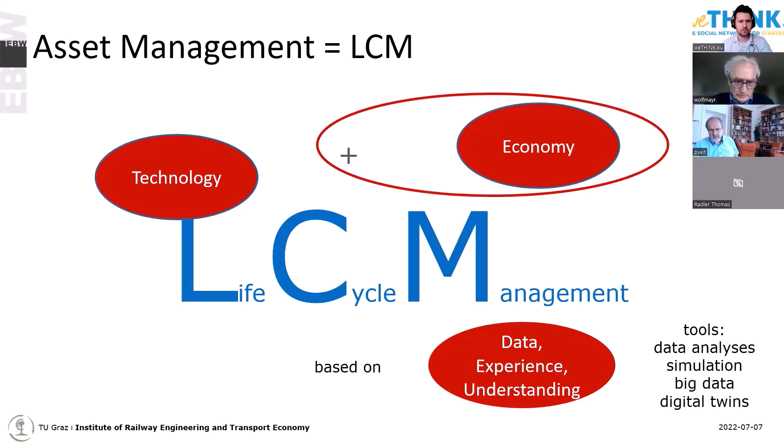Today we are focusing on the methodologies of the economic evaluation, because there are some specific things in railways which need adaptations of the methodologies. The methodologies of the evaluation are, of course, the standard methodologies, but we have to take some things into account.

So how do we understand this? We see the economic evaluation is based on a technical description. We already discussed this technical description in seminars before. Our way of describing a technical situation is a standard element. That means we look on track side, which parameters are there for a certain section of the track—how much traffic load, which radii, how is the subsoil, which superstructure, and all the parameters which influence the behavior of track.

And for these parameters, for such a mix of parameters, we could analyze the service life and the maintenance demand of a track. This is possible due to our data situation. I have time sequences of all infrastructure data for track and turnouts, operation and maintenance, components and ages, and things like this. We have these data at the Institute from the Austrian Railways, and we have got these data now in a time sequence of 20 years. So we see how it changes, we see the behavior, and we can do our analysis.

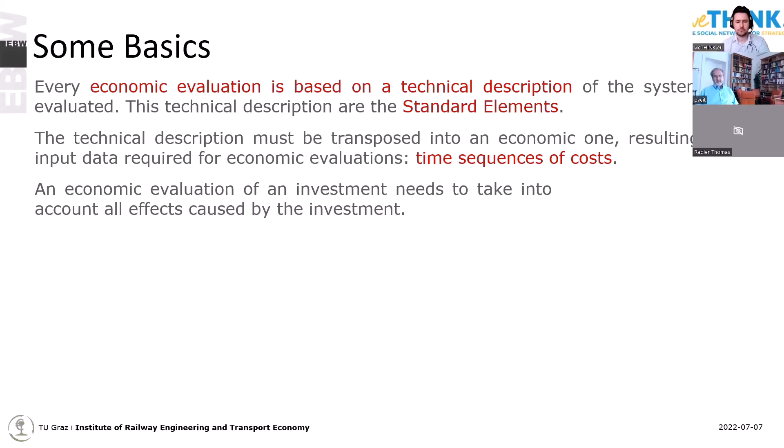There are some main principles which you might say, of course, must be like this. Within an economic evaluation of an investment or any decision, we need to take into account all effects caused by that investment. What does it mean, all effects caused by the investment? When you decide to use this or that track component and implement it in your network, there's the first question: how long is the time span which you have to look at? And if you take this sentence seriously, you need to take all effects into account to make a proper decision.

We are at life cycle costing, because whenever you put a component into track, it will influence your costs and track behavior as long as it is in your track. There is no component, or there's only one component which does not cause costs later on, and that's the component which you do not implement. Every component in the track has an influence on track behavior, therefore on maintenance demand, and therefore on costs for the entire time it is in your system.

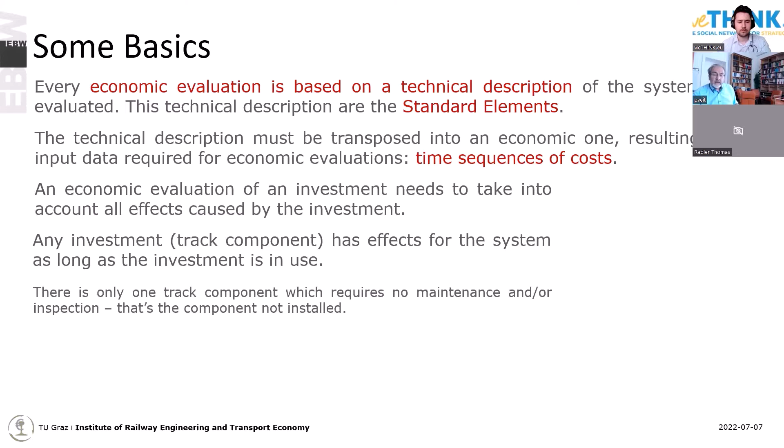That means the life cycle view is not just one approach to decision making, it is a precondition. Otherwise, you would never have a full view of the effects, and you would not know which effects you do not take into account, whether they are relevant or not. So you have to have a life cycle view.

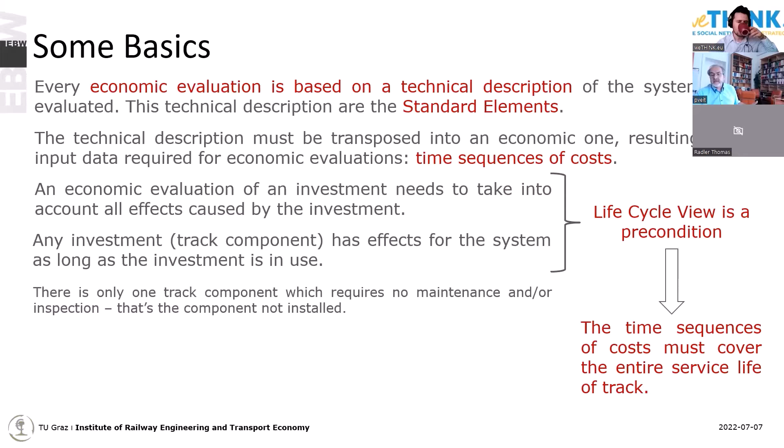That means when we take all the life cycle into account, we are basing everything on cyclic maintenance. So you do an investment, then you do years and decades of maintenance, and then you put in the next investment. So we have to take the time span from the investment to the reinvestment. If we want this as a time span for our economic evaluation, we have to have the costs over the sequence of costs over the entire service life.

Sometimes we can work with standard elements, sometimes we work with specific data, but anyhow, we have to change from our standard elements to cost sequences.

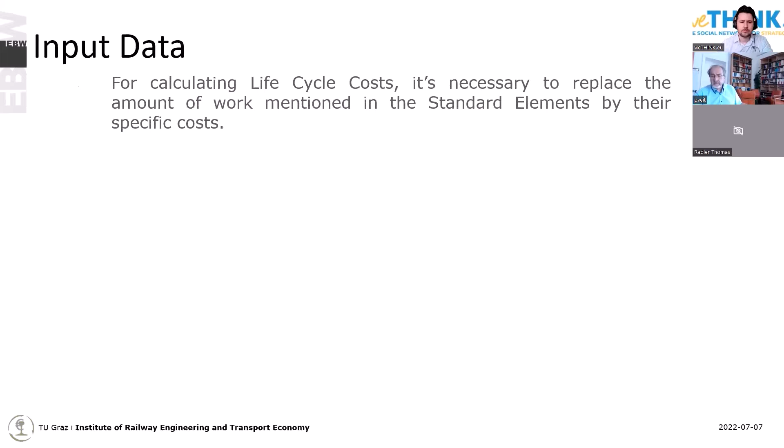The standard elements look like that. On top, you have a lot of information, we call that parameter. The description below is valid for a section with heavy traffic, so more than 70,000 tons per day in track. We have a good subsoil condition, concrete sleepers, a 60 kilo rail with standard steel grade. It's in a more or less straight section, so radius bigger than 3,000. It's on a double track line, and there is more information about that. That is the description of the track.

This is the parameters which are relevant for a certain given track section. And then the standard element tells us under these boundary conditions, such a track will have a 25 year service life, so it's 26 years because we start with 0. That has a reason in the economic evaluation.

And then such a scheme just gives us the information on what needs to be done when. So at the beginning we have an investment, the track laying, the general renewal. In some countries, half a year after track renewal we have one stabilizing, tamping that is then in the same year, and we do a grinding of new rails, for example in Austria.

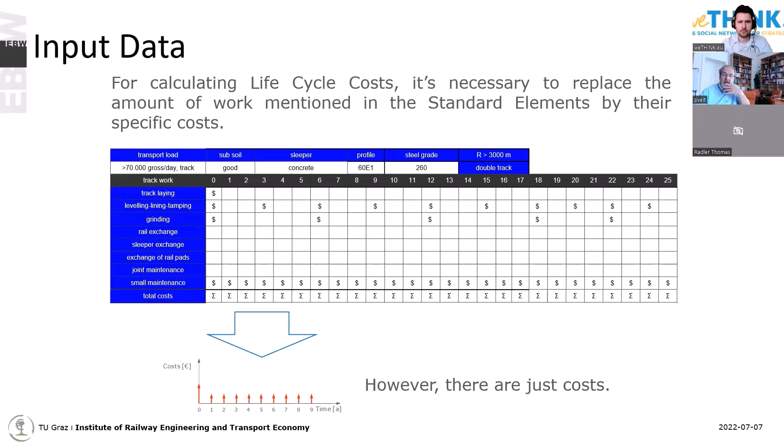When you have this picture, when you see these costs and the work which is behind these costs, you can analyze which amount of the total costs of service life is caused by investment, which portion is caused by maintenance. And there is a third point: which costs are caused by the maintenance operation or investment operation, but are not infrastructure costs.

We call these costs of operational hindrances, meaning we are doing track work anywhere outside in the network. Let's take a simple example: we are tamping. When we are tamping a section, we are hindering the operation. No train can pass, no train can go on that track where the tamper is working. At least hopefully no train comes into that section.

So that means for the operator, he has additional costs. He has costs because he has delays, or perhaps if a whole line is closed, he has to run another way, use another route, or do a bus service instead of the rail service during the time of that work.

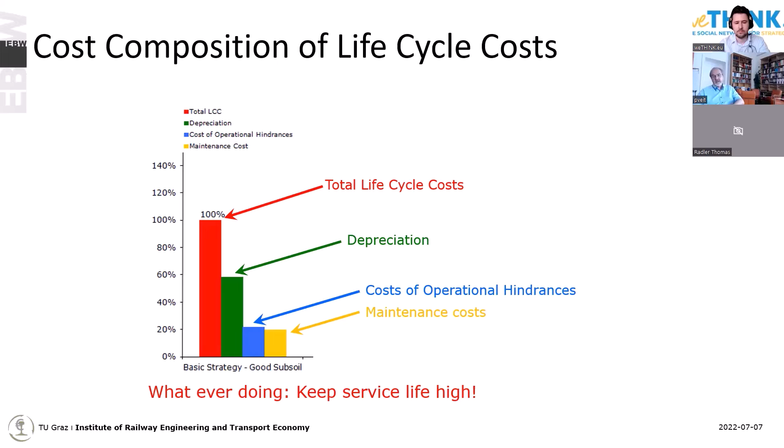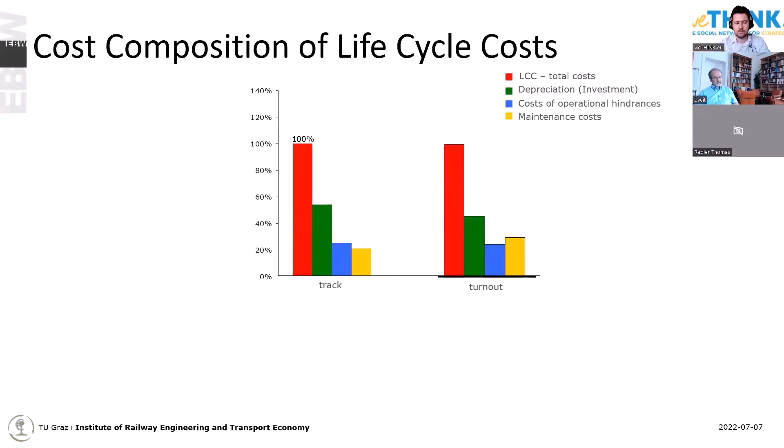And so the two most costly components of asset management infrastructure work like this. I have put here the same picture for track once again, and put the picture for turnouts on the second side. Turnouts are a little bit more complicated, so they need a little bit more maintenance. But still, depreciation is the highest portion. So we have in principle the same outcome.

One big difference: life cycle costs of turnouts are roughly 11 to 13 times higher compared to open track. So this 100% compared to this 100%, then this is 11 times more. The distribution between the main cost portions is slightly different, but it comes to the same outcome, to the same conclusion, and the conclusion is let's increase service life.

All innovations, all research on track has the target to increase service life. This will be even more important in future because the target of at least European railways is to shift transport from road to rail. The target - Austria has the best modal split in freight in Europe and the second best in passenger transport in Europe. Nevertheless, Austria's target is to double the train numbers until 2040, to double it.

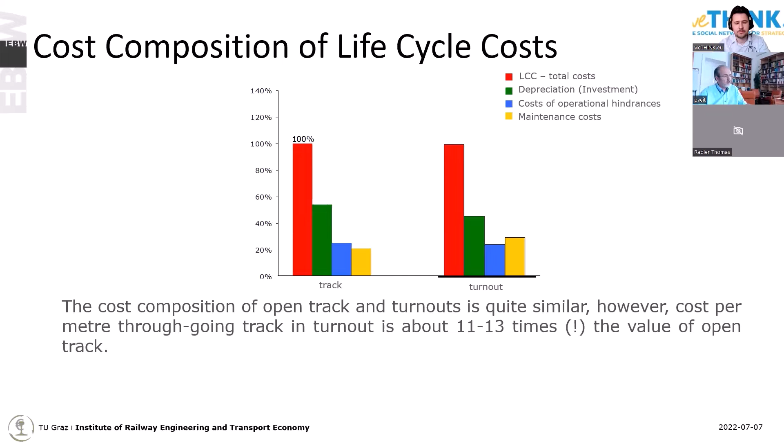And now we run into a problem which gives more importance to sustainability. And this problem is when we double the train number, we will have less time for maintenance. And then this is really a big danger in future. And the only way to solve that problem is to go for more sustainable track systems.

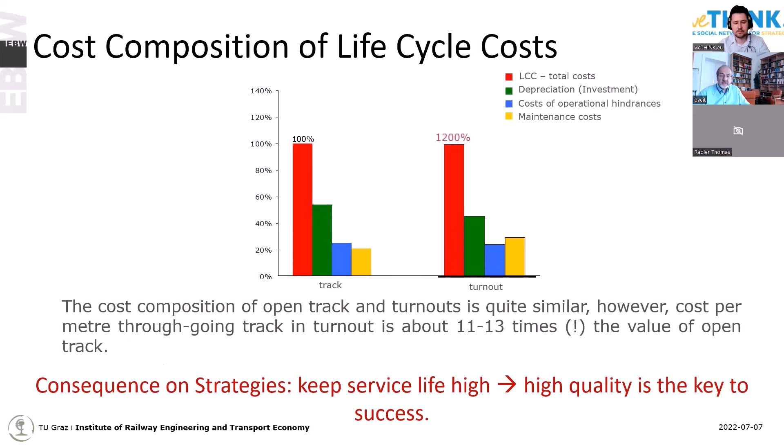We want to increase service life, and the only way to increase service life is to increase quality, because an increased quality is reducing the deterioration, and that gives service life. When we have this distribution, and that's already important for the economic considerations, we will have a look at what are the most important cost factors. The most important is the initial track quality.

If the subsoil quality and drainage are not working properly, we cannot optimize the track, and we come into extreme high costs. The factor I've given here is a realistic factor from an example we found in the network, but to be open, it was the worst case.

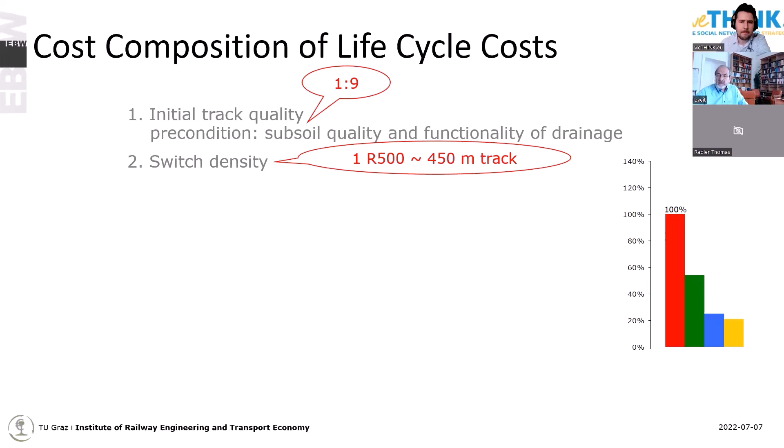In the worst case, you have 9 times higher life cycle costs. The next point is switches, density of switches. Turnouts are so expensive that we should build them only where we really need them.

Ballast quality is quite important, and it's underestimated, I think, in a lot of cases, because if you have poor ballast, this can reduce your service life by an important amount, as you see here.

Radii, of course, sharp radii is more expensive. Cost of operational hindrances in extreme cases can come up to 30% of life cycle costs. Of course, in a branch line, they are not very important.

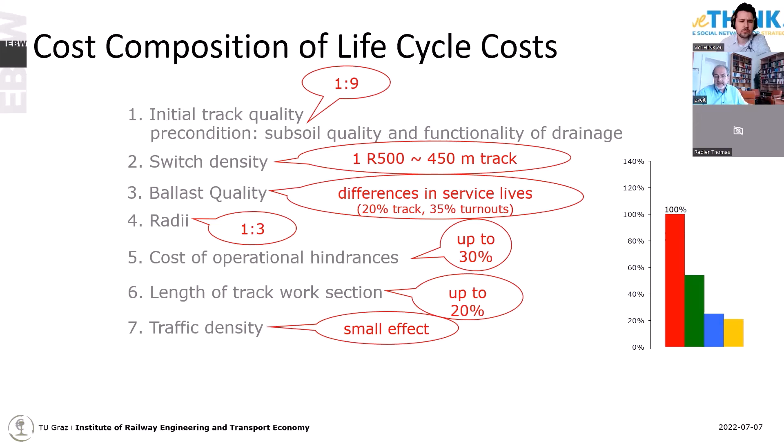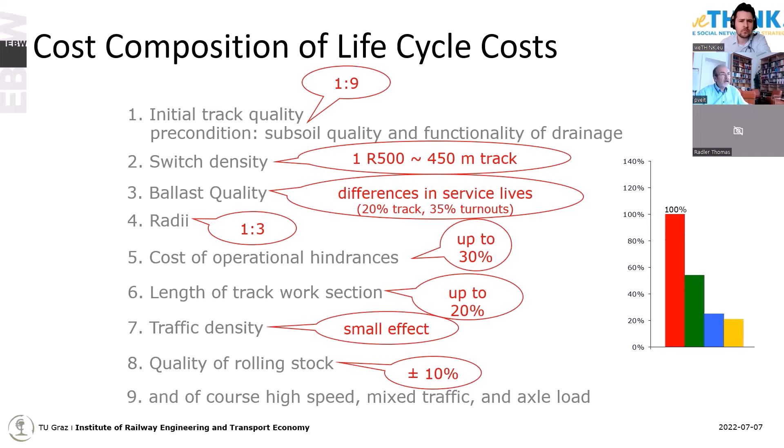So we have the time sequences of costs. Having this, we need to choose a proper methodology for the calculation.

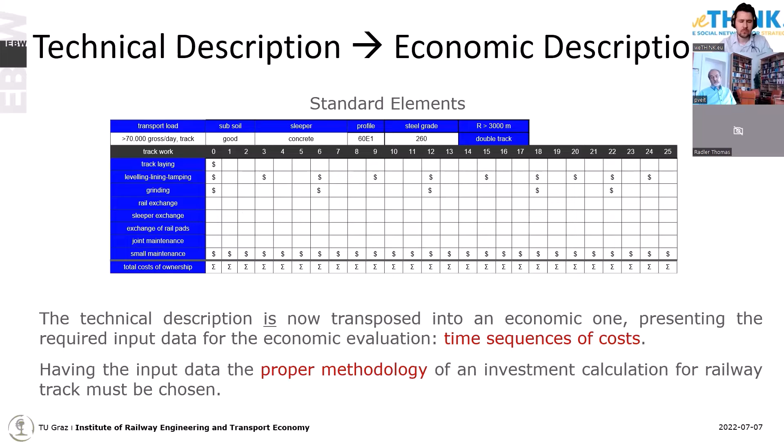We always use dynamic economic calculations. Static economic calculations do not take into account the cost of money. And as we have such long service lives, these costs are very relevant, so we need to go to dynamic calculations.

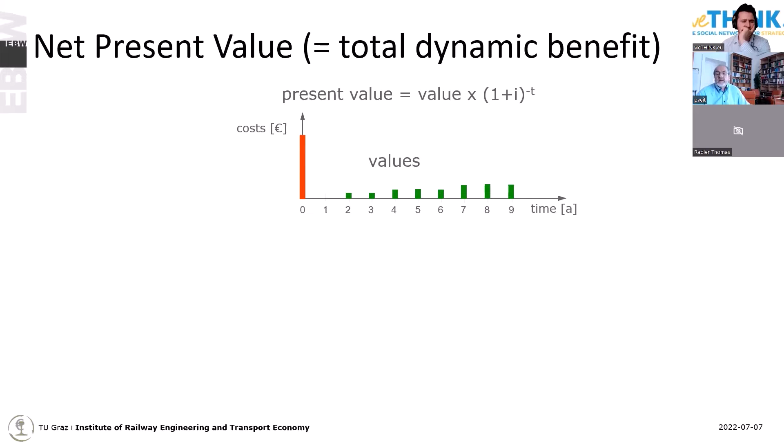The dynamic calculation is based on discounting the values to a present value. This means you take the normal time sequence of costs and discount it with the cost of money, the cost of fixing money. With this rate, you discount it and take into account the timing of payment. You can then sum up all the costs, because a payment in year 9 is not the same value as a payment in year 0, and this is taken into account through the discounting rate.

So we get a net present value, and of course if the net present value is positive, you have a profitable project. We have no income here, so if you have the least net present value of costs, you have the best project.

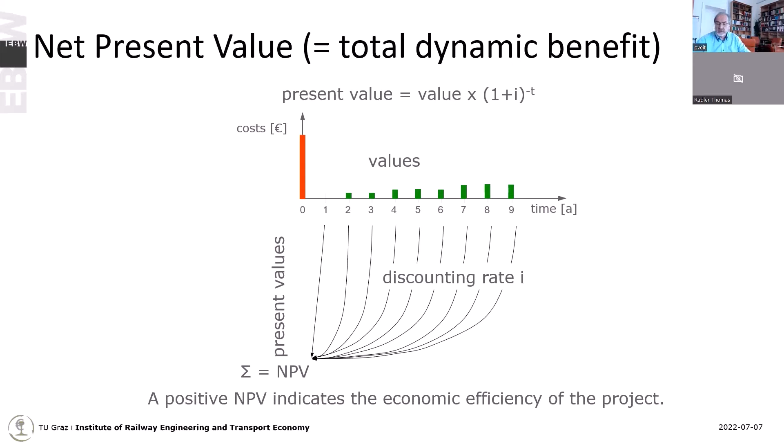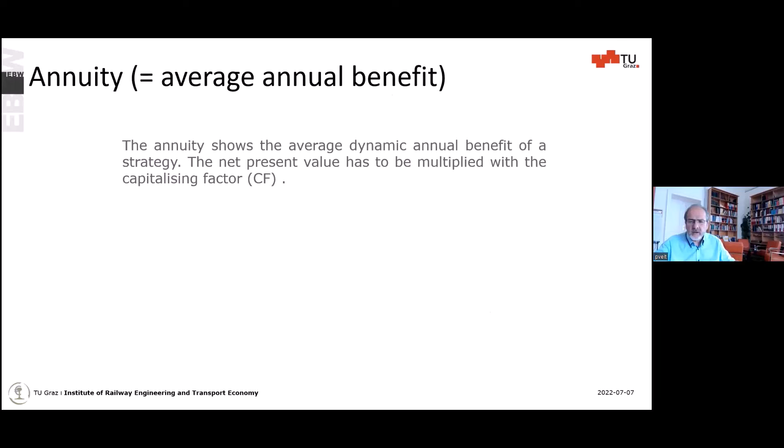The next calculation methodology is the annuity, the average annual costs or benefit. This is calculated in a simple way: you multiply the net present value, the total costs of a given service life, by a capitalizing factor, which is just a formula, and you get the average annual dynamic costs. This is the calculation which we really use, and we have to discuss it.

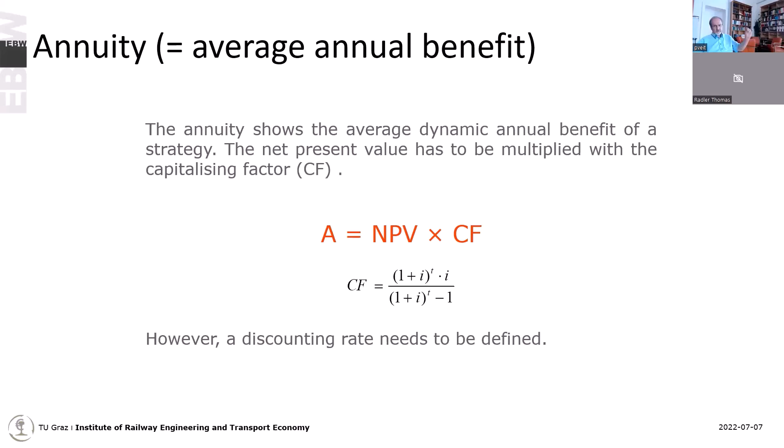However, you have to define this discounting rate, and it should be the net rate of the cost of money in your company, without inflation. It's important not to put in discounting rates higher than your actual cost of money, because if we have 0%, we are static, every payment has the same value.

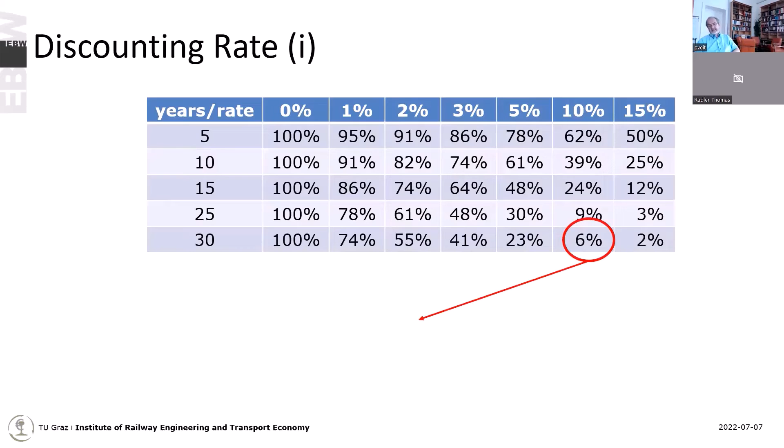If we have just a discount rate of 1%, already a payment in year 30 is only valid at 74%. That's fine. But if we go for high discounting rates, then we contradict the idea of evaluating sustainability. Let's take 10% discounting rate - that would mean a payment in year 30 is practically not taken into account. And that would be wrong, because we want to picture the total service life, we want to picture sustainability.

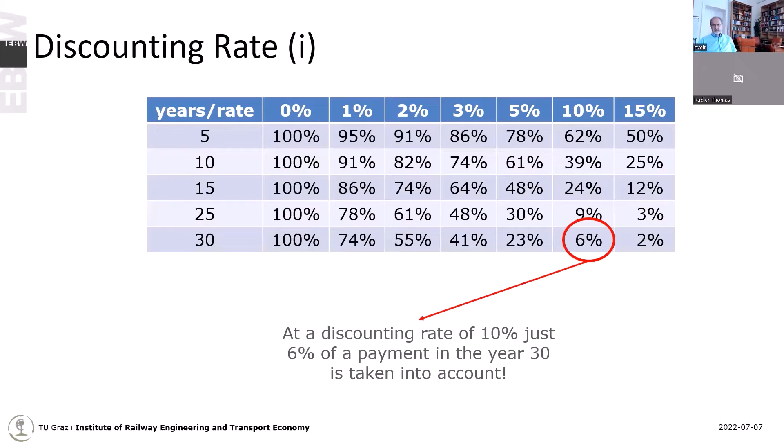There is a proposal by the EC for net discounting rates depending on service life, and for railway they should be a maximum of 4% without inflation. If the service life is short, you can use more, but in our field it should not be more than 4%.

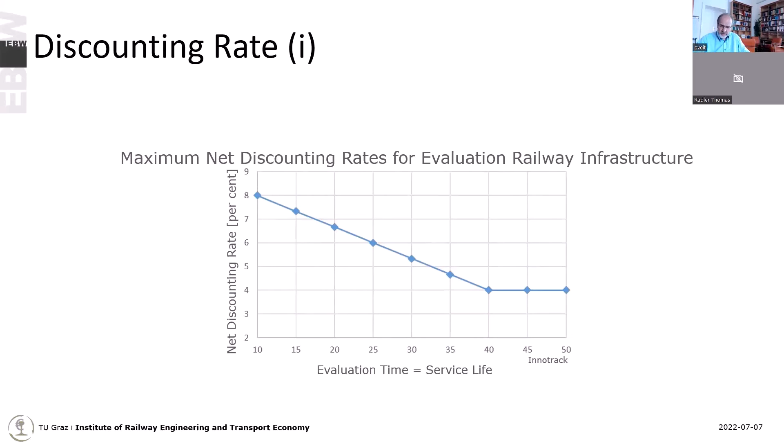If we set the net present value to 0, we can calculate the internal rate of return. We calculate the net present value for a given discounting rate - we can use any discounting rate, and every rate would deliver another net present value. If we take 0, we are at the static solution; if we take more, we get a function of net present values.

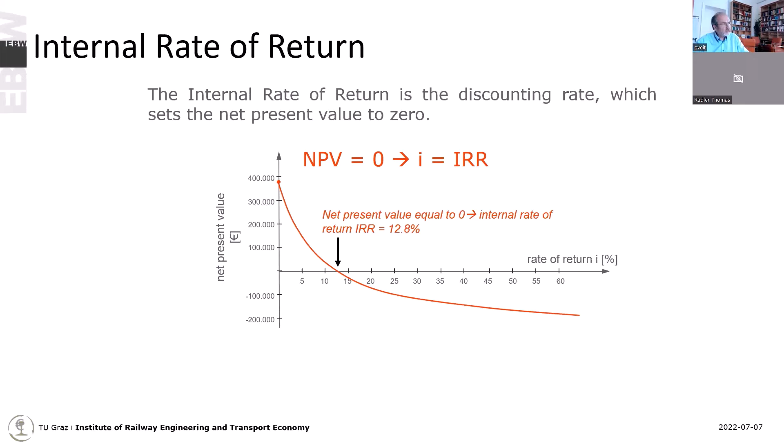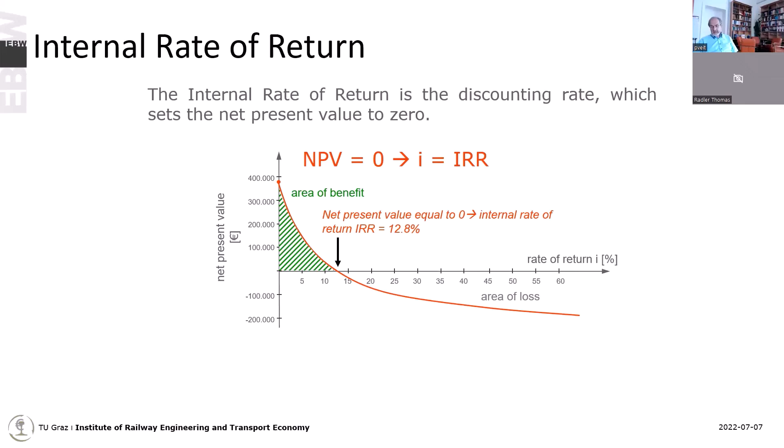This function crosses 0 at some point, and that's an important economic figure, because for rates less than that - if you pay less than 12.8% for your money - you have a benefit. If you have to pay more for your money, you'd pay more to the bank than you gain from the project, so it would not be advisable.

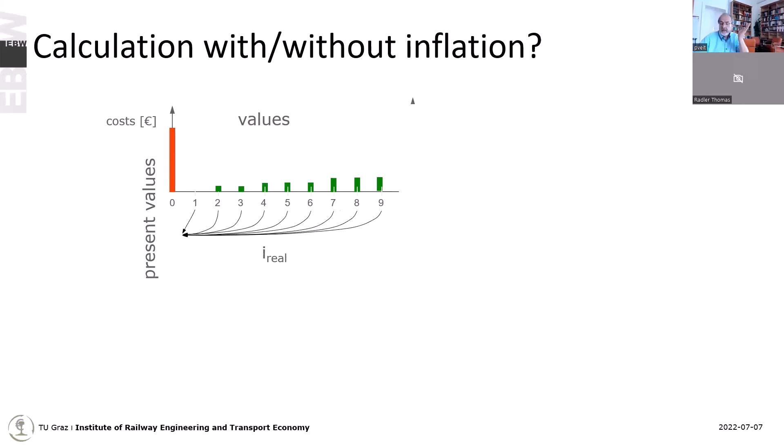The big question is always, should we do the calculation with inflation or without inflation? I want to show this in an example.

Either we do it without inflation, and then we take the real, net discounting rate. Or if we do it with inflation, we first have to calculate in the inflation, increasing the costs in future due to inflation, and then discount it with the total rate. The nominal discounting rate is the real rate multiplied with the inflation. Let's do that in an example with figures to see it clearly.

If I have a payment in year 5 of 10,000, and we assume the real cost of money is 2%, the inflation is 1.5%, you see the example is before inflation went up dramatically. That would mean the nominal value would be 3.53%. So now we do the calculation without and with inflation.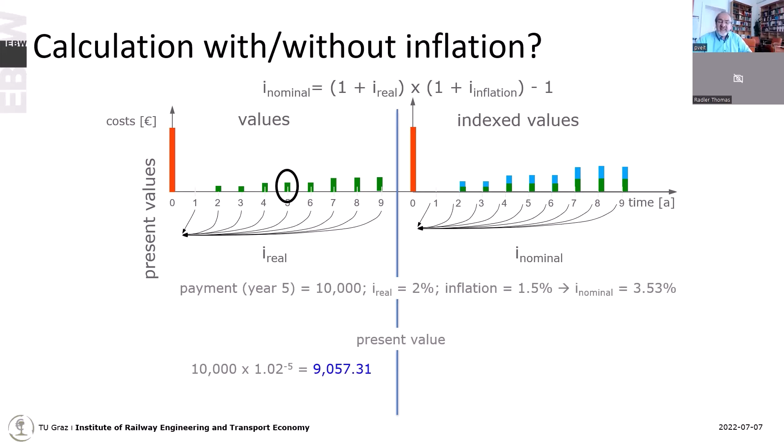The present value is the discounting of this value in year 5 back to year 0. If we do not take inflation into account, we discount with the real discounting rate, which is 2% — the real cost of my money. I have to discount it for 5 years, so I multiply the 10,000 with 1.02 to the power of -5.

That would mean, from today's point of view, this payment in year 5 has a value not of 10,000, but of 9,057 and something. You can interpret it this way: if I today put 9,057 euros in my bank account at a 2% rate, in 5 years I would have 10,000. So for me today, it's just a value of 9,057.

Now we do the same calculation taking inflation into account. We do it in 2 steps. First, we increase the value in year 5 due to the inflation rate of 1.5%. It's an increase over 5 years, so it's to the power of 5. This gives 10,770 euros — meaning my 10,000 of today would be nominal 10,770 in year 5.

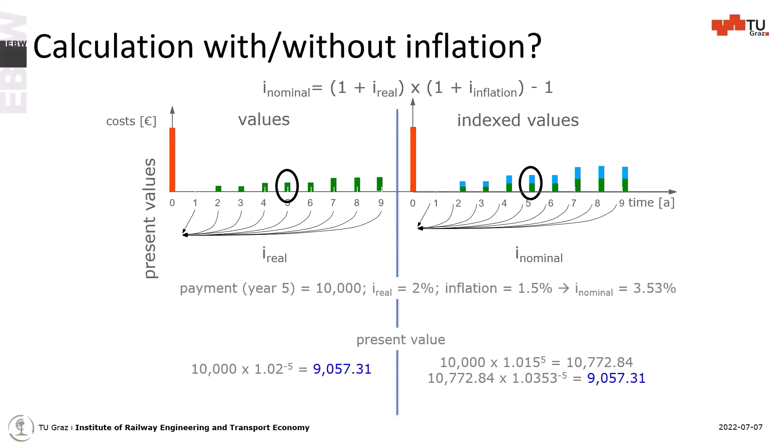Therefore, in most European countries, it is calculated without inflation. This avoids the endless discussion on rates of inflation, which is not necessary because it's not important what you put in.

If we look at the economic methodologies available, there are static solutions and dynamic solutions. The specifics of railway infrastructure is that we have no assignable revenues, so we focus on costs. We cannot take the total profit — we have to take the annuity of the costs, or the internal rate of additional investments, and so on. We are taking just the cost side.

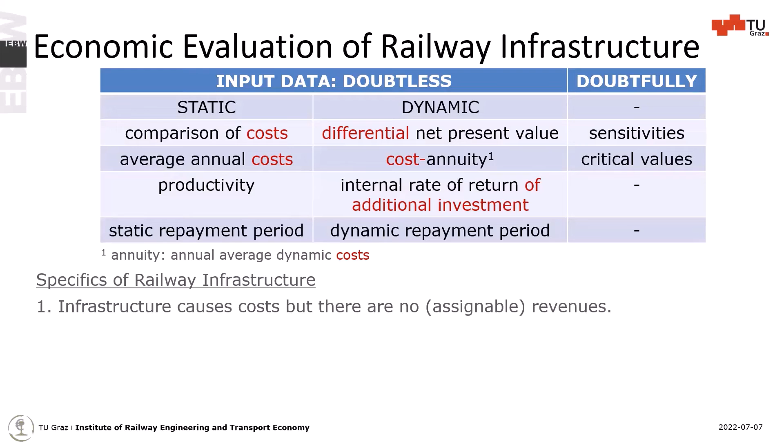That means if we go to annuity, knowing it is costs only, we choose the one with the least annuities — the least costs over the entire system. We're choosing the cheapest one. But since we take the entire service life into account, the cheapest one is also the most sustainable one.

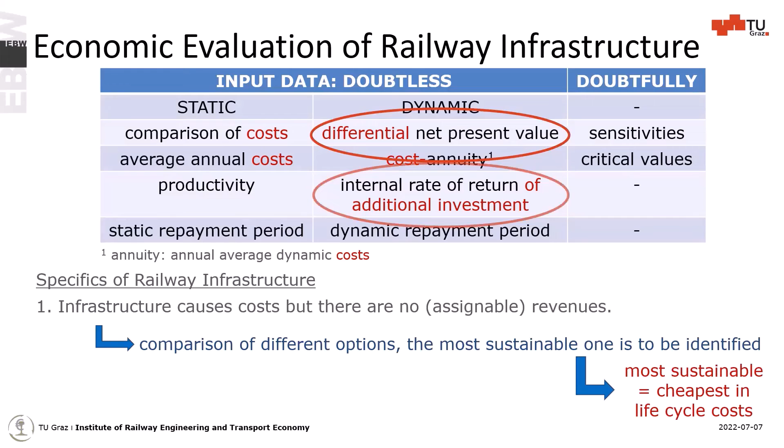So if we have, for example, this standard element and another standard element which we want to evaluate, it is something different, and we compare that, it would be very simple. We could use these methodologies.

We could use the net present value. But what happens if our solutions do not have the same service life? The net present value is the total costs over the total service life. So, of course, if option B has a shorter service life, it's very likely that it has shorter costs over the entire service life.

Therefore, we cannot compare option A and B with the net present value. But we could compare it if we do not take the total costs of the service life, but we calculate this down to the average annual costs. Then we can compare it.

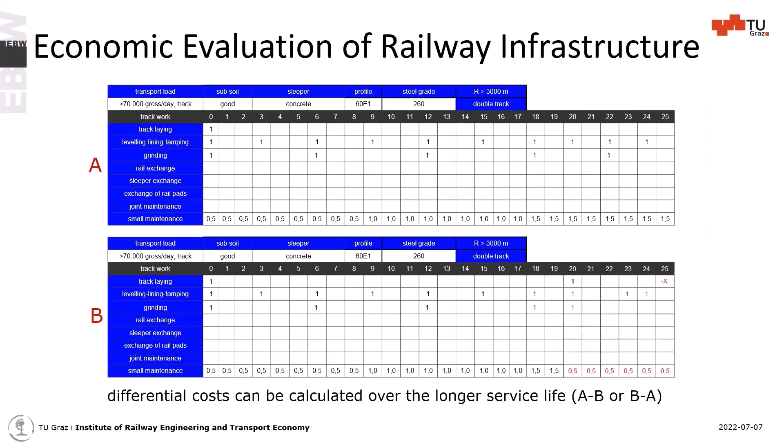And that's especially the annuity. So our most important conclusion for the methodology is we have high service lives. That's very important. Otherwise, we could not afford our system. It's too costly. That means we have high costs and capital commitment. That means we must not do any static calculation. We need to do dynamic calculation, which takes the point of time of payment into account.

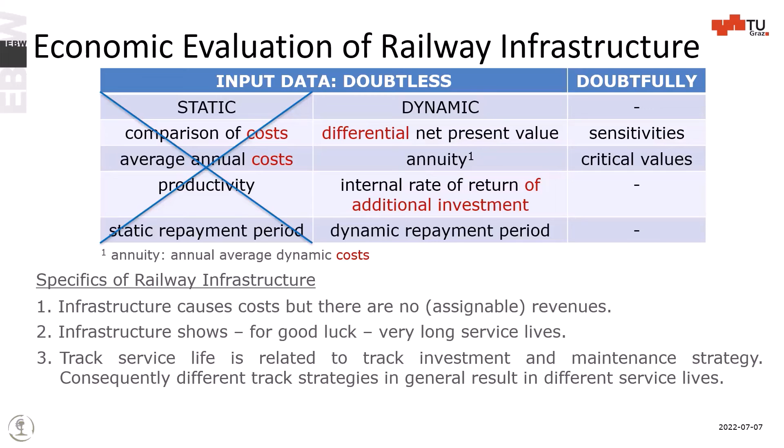And as we have got different service lives, normally, when you have an innovation, the target is in general to have longer service life. Perhaps you have more investment costs, but then you have to compare if this option with the innovation is better than the given option. That means you compare different service lives, and you cannot do it with net present values. You have to go for the annuity.

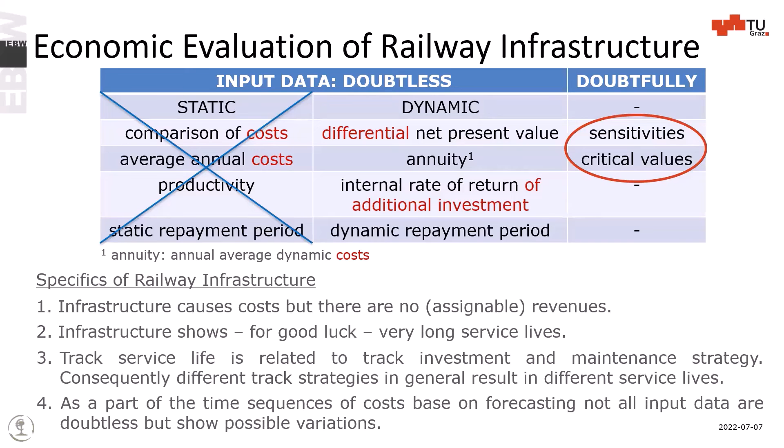And we do some sensitivity analysis, because when we picture the future, we go into prognosis. When we go into prognosis, we have some uncertainties in the prognosis, and we have to work with this as well. The sensitivity analysis cannot reduce the risk. They cannot make the prognosis better. That's not the target. That's not possible.

But they can tell us what happens if the prognosis changes a little bit. And therefore, you can analyze if you have a little bit change in the tamping costs. Has this a big influence on your decision? If you change the service life, has it a big influence or not? So you get a feeling where the risk is really coming from.

And when we are doing such strategies, what is the result of our economic calculations? So I tried to show you that we are going for the average annual cost, so the annuity, the average annual dynamic cost. What does it cost per year seen over the entire service life? But we know that our input data are, yeah, I know what tamping is in the next 2 years. Do I really know how much is the tamping in 40 years?

I do not know what the development of the tamping machines will be. Perhaps they have more capacity in 40 years and the costs are reduced. Perhaps not. I don't know it. So the more in future, the more you have uncertainties in your calculation. That means when we are calculating the annuity for 40 years, so we know the system will keep for 40 years and we calculate what will it cost in average per year 40 times. The only thing which I really know is this figure will not become true in 40 years. There will be some slight changes.

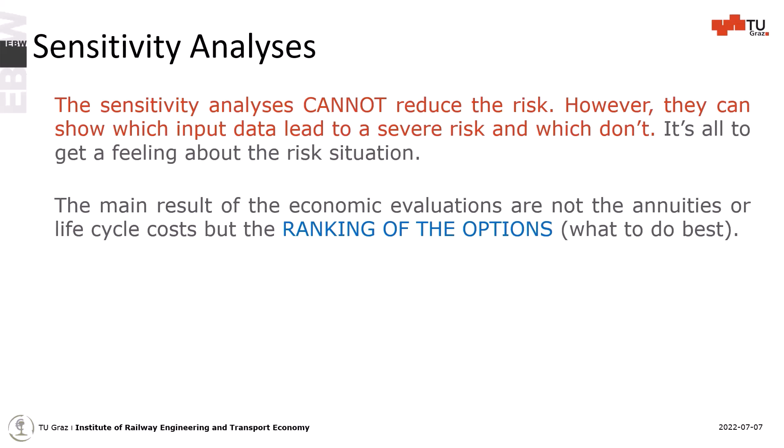And with this, I have a basis for my decision making. I can tell the investor, please use this superstructure in that situation. It will be the best you can do.

There is one thing which is quite nice, and that's the critical value. The sensitivity analysis would only be... I'm not sure about the 40 years. Some people guess it is 42 years, some people guess it's 38 years. So I calculated with the other figures, and look if the ranking keeps stable. Another thing is to calculate a critical value.

I know I have an innovation which is more costly and which has other effects, and the people expect 20% more service life. But you are not sure about this 20%, because you will know it precisely in 30 years. Some people guess 30%, some people 20%, some people say it's less. And then you can calculate how much it should be that it can cover the additional costs of the investment.

And this is information - for example, you say, without innovation I have 40 years. With innovation I think it's 48 years. Now you calculate how much increase of service life you need so that this option still is the best option, so that it's equal to the second best. And then, for example, I get 47 years. That would be a bad result. The assumption is 48, and it works if I get minimum 47.

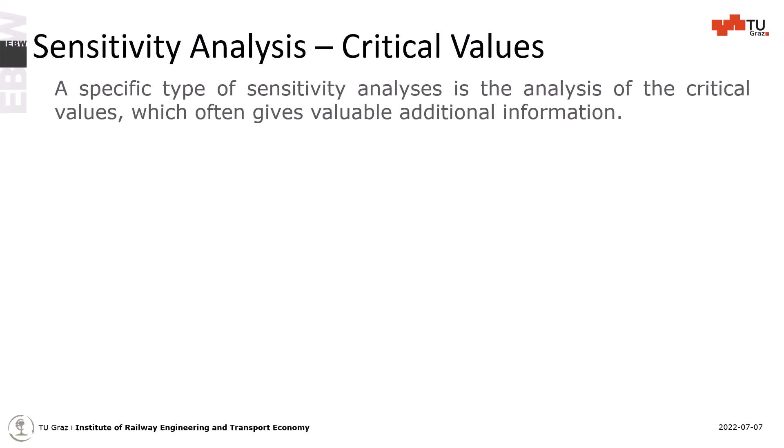That would be risky. If my result for the critical value would be 41 years, then without innovation it's proven, it's known, it's 40 years. And now I have innovation where we expect an increase of service life of 8 years, but we just need 1 year for showing its economic efficiency - then I have very little risk on this additional service life. So you can get a feeling about the risk. That's it.

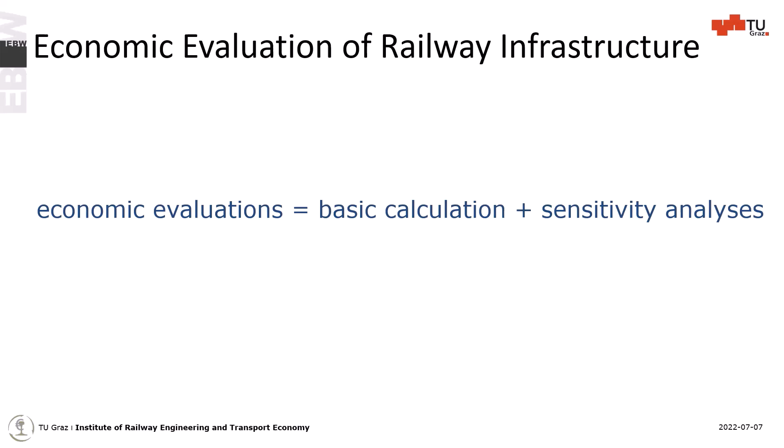That means whenever you do an economic evaluation, especially in the field of railway infrastructure, we face the problem that we have to do it for a long period of time. That means in a lot of cases you have to go into prognosis, and prognoses are always more or less precise - they have an expected value and they have some differences. Therefore, the economic evaluation, the basic calculation which gives the annuities and a ranking, is not sufficient. Every economic evaluation must have the basic result and then discuss the risk of the decision. So you do sensitivity analysis to get a feeling of the risk.

That's the theory. So if we come to the question of asset management, and we are now in the evaluation, we have 3 questions within asset management. The first question is: which component should I use? That's an investment strategy. And please, you cannot calculate this for the average track, because the average track does not exist. The average track would be a single or double track line, electrified or not electrified, with small radii or more straight, heavily used or little used - this is the average. You don't have it anywhere. Therefore, we split it into different parameters, into different typical situations.

And for every typical situation, you have to do your economic evaluation. The outcome is that you will have a strategy for components which differs. You will use in a straight line another steel grade than in sharp curves, because in sharp curves you have much more wear, so you need a more wear-resistant rail. In the straight line, where the flange never touches the rail, you don't need this wear resistance. So you have specific solutions. That is the first question.